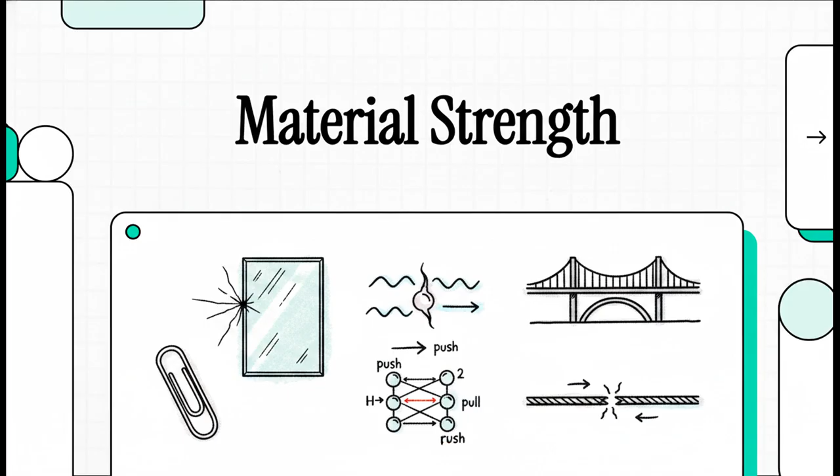Today, we're digging into the science of material strength. We're going to find out why things bend, why they stretch, and, most satisfyingly, why they snap. So let's get right to it. What actually makes something strong? It sounds like such a simple question, but the answer is way more interesting than you'd think.

See, it's not just about how much force something can take. It's all about how a material behaves on the inside when that force is applied. And to really get it, we need to look inside the material itself. Okay, to get our heads around this, we're going to start with the absolute simplest thing you can do to an object. Just pull on it. This is called tension, and it's the perfect way to introduce the two most important concepts in all of material science: stress and strain.

Picture this. We've got a simple steel wire, just hanging from the ceiling. Now, we start adding weights to the bottom, one by one. As we add more weight, which is just another word for force, the wire starts to stretch. It gets longer. Now, that seems totally obvious, right? But what's really happening inside that wire is a constant, invisible battle.

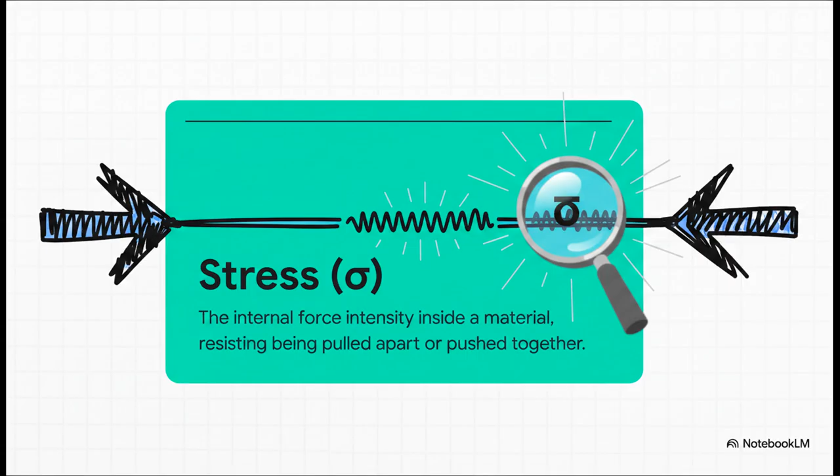So, the first big idea we need to tackle is stress. You'll see it written as the Greek letter sigma (σ). Now, here's the key thing. Stress isn't the weight we're hanging on the wire. Stress is the internal force the wire itself creates to fight back. It's the material basically screaming, hey, you are not pulling me apart that easily. It's that internal resistance spread out over the area of the wire.

And what happens when the material is under all that stress? Well, you get strain, represented by the Greek letter epsilon (ε). Strain is the thing we can actually see and measure. It's simply how much the wire has stretched compared to how long it was to begin with. It's just a ratio, so it doesn't have any units, which is kind of neat. It's just a pure number that tells us how much it has deformed.

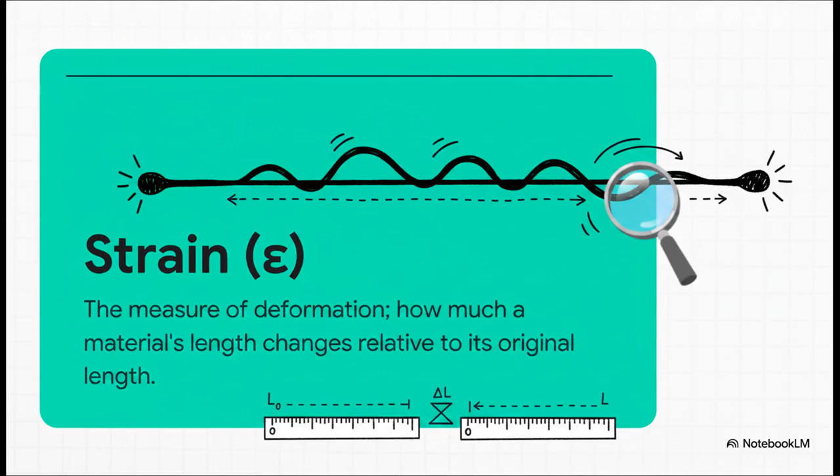So here's the bottom line. The one thing you absolutely have to remember. Stress is the cause, strain is the effect. Stress is the invisible fight going on inside the material. Strain is the visible result of that fight. You get this relationship, and you've unlocked the secret to pretty much everything else in material science.

Now here's where it gets really cool. If we plot that relationship, if we track how much internal stress is building up for every tiny bit of strain, we get something called the stress-strain curve. And honestly, you should think of this curve as a material's biography, or maybe its personality profile. It tells you the entire story of how that material is going to act under pressure, from the first gentle pull all the way to its catastrophic end.

Let's check out the personality of a real workhorse material, mild steel. As we start pulling on it, the stress and strain go up together in a nice straight line. That's the elastic region. If we let go anywhere in this zone, it snaps right back to its original shape, no harm done. But then we hit the yield point, and that's the point of no return. The material has started to permanently deform. It gives up trying to go back.

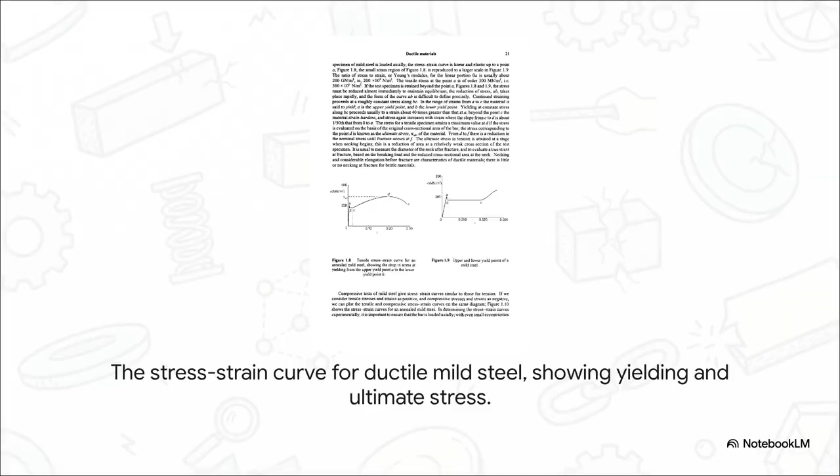As we keep pulling, it actually gets a bit stronger for a while. That's called strain hardening, before it reaches its absolute maximum strength, the ultimate stress. This whole behavior makes mild steel what we call a ductile material. Ductile materials are, well, they're the forgiving ones. They bend, they stretch, they give you a ton of warning before they finally fail.

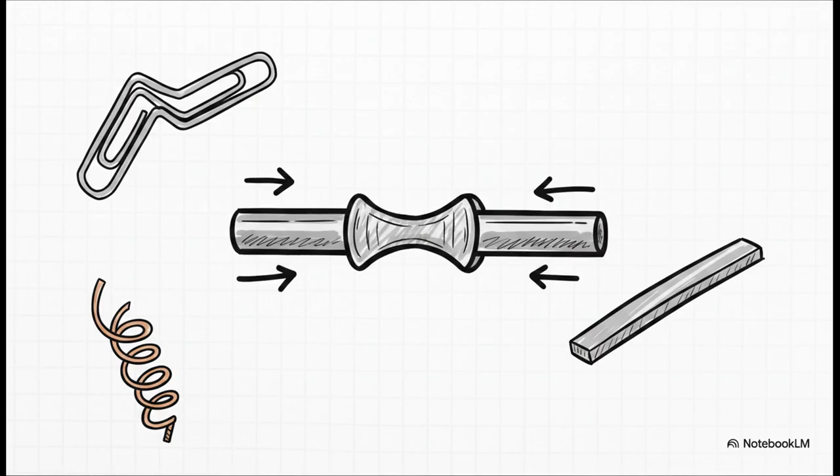You see that thinning area that happens right before it breaks? We call that necking. And it's a huge visual clue that things are about to go very, very wrong. It's exactly what happens when you bend a paperclip back and forth.

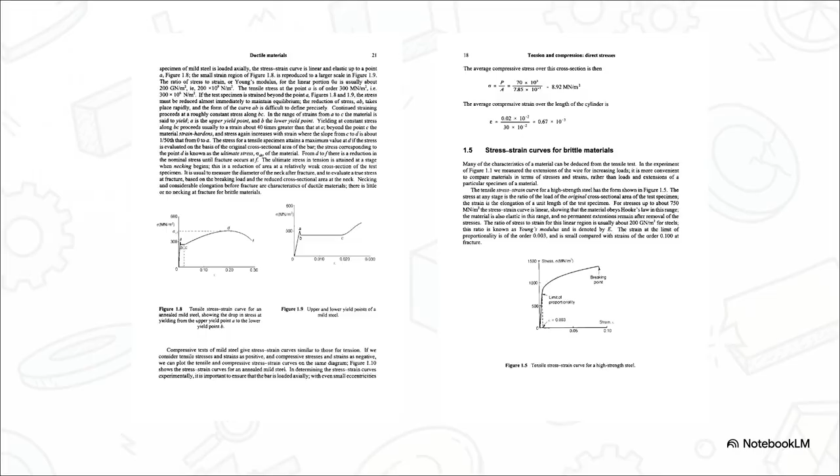It just snaps. And that's the whole deal with brittle materials. They are incredibly strong right up until the moment they're not. They give you almost no warning, no plastic deformation before they just fracture completely. Think about a pane of glass or a ceramic coffee mug. They don't bend, they just break.

This is also why concrete is so weak if you try to pull on it. It's a brittle material and just can't handle stretching. All right, so we've covered pulling things apart and squishing things together, but forces don't always act head-on. What about forces that try to slice through a material or make one layer slide past another? For that, we need to talk about a whole different kind of stress, shear.

This is shear stress. And we use the Greek letter tau for it. The best way to picture it is to think about a deck of playing cards. If you push on the top of the deck, the cards all slide past each other. That sliding force between each card is a perfect analogy for shear stress. It acts parallel to the surface, not straight into it like tension or compression.

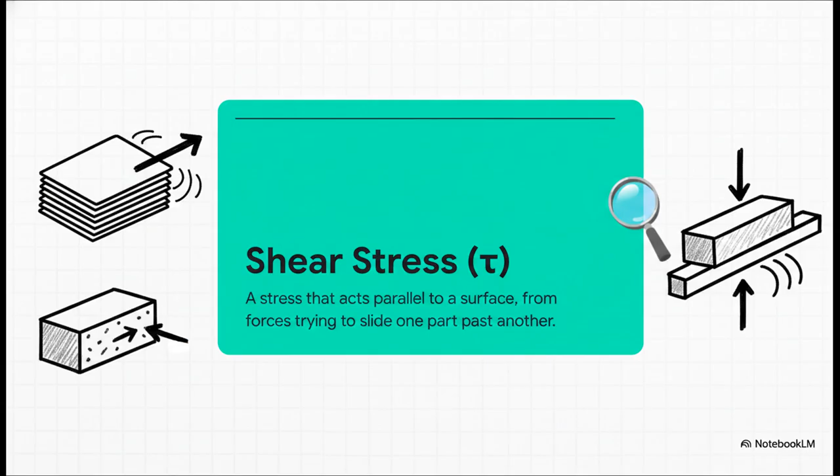And once you know what to look for, you see shear everywhere. The rivets holding the plates of a bridge together, they're under intense shear, fighting to keep those plates from sliding apart. The same goes for the bolts in your car's engine. Heck, even using a hole punch is a classic example of causing shear failure. You are literally shearing a little circle of paper out of the main sheet.

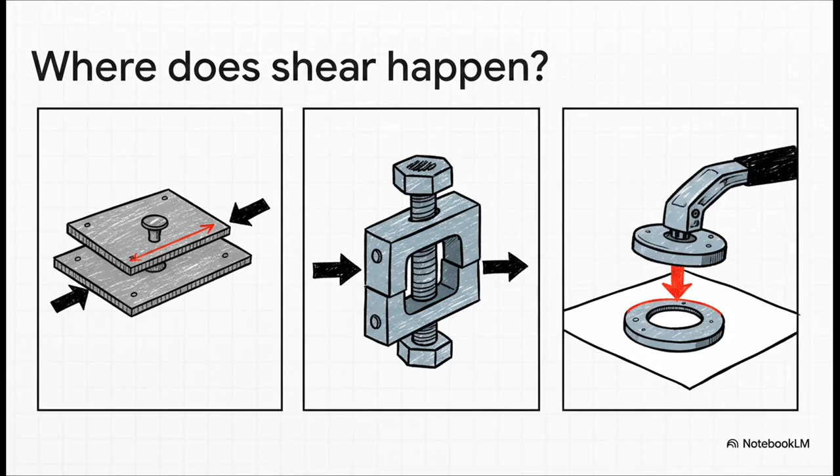And here's a little mind bender for you. Even when you're just pulling on a bar in simple tension, you are creating shear stress deep inside it. But the wild part is, the maximum shear stress isn't straight across the bar. It's actually acting on planes that are at a 45-degree angle to the direction you're pulling. These forces are always connected in surprising ways.

So, in the real world, these forces hardly ever show up to the party alone. They're all mixed together. A simple beam holding up a load is the perfect place to see this complex dance between tension, compression, and shear, all happening at the same time. Let's take a look at this cantilever beam. It's just a beam that's fixed at one end, with a force pushing down on the other. It looks about as simple as it gets, right?

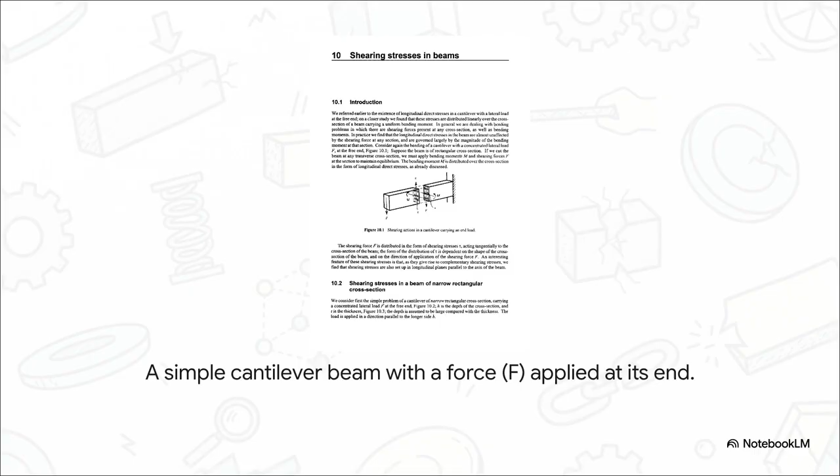But believe me, inside that beam, there is a total war zone of competing forces raging at every single point along its length. So as the beam bends down, it's pretty intuitive that the top fibers are getting squished together, that's compression, and the bottom fibers are getting stretched apart, that's tension. Simple enough, but what's stopping the top half and the bottom half from just sliding past each other? What's holding it all together?

And this is where shear comes back in as the unsung hero of the story. The shear stress isn't the same everywhere in the beam. In fact, it's zero at the very top and very bottom, right where the tension and compression are the strongest. The shear stress is at its absolute maximum right along the neutral axis, dead center in the middle of the beam. That's where it's working the hardest to keep the beam from tearing itself apart.

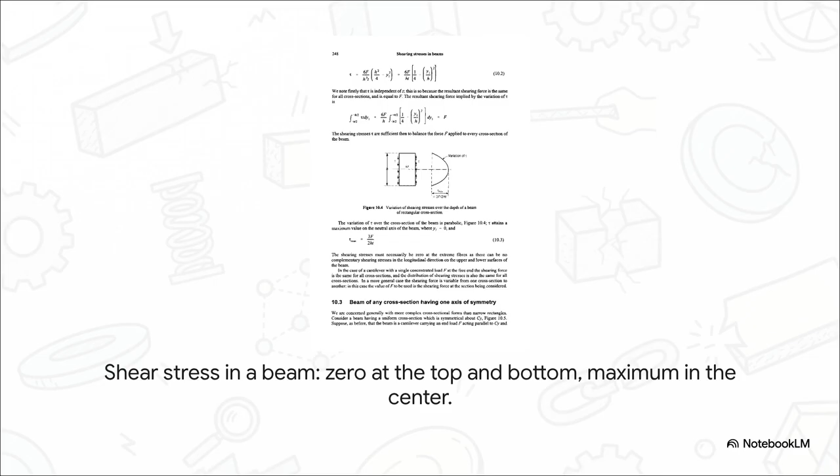So why do we care about all these invisible forces? I mean, why go through all this trouble? Well, because understanding them is literally the only reason our buildings are still standing, our planes stay in the air, and our bridges don't just collapse into the river. It's the absolute bedrock of safe engineering.

At the end of the day, every single structure you rely on is the result of a very careful set of calculations. Engineers have to understand exactly how stress, strain, and shear are going to affect every single part, just to make sure those internal forces never, ever exceed what the material can handle. The whole process really boils down to this three-step dance.

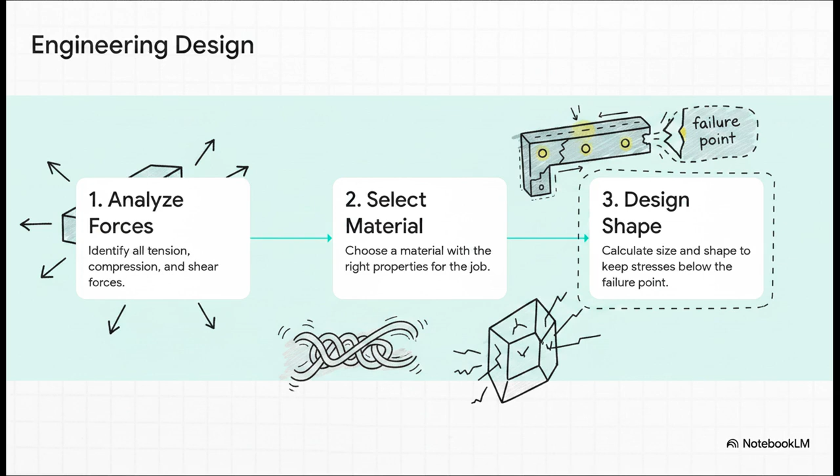First, you analyze all the forces that are going to act on the part. Second, you pick a material that has the right personality. Do you need something ductile that will bend and give a warning, or something brittle and rigid? And finally, you design the exact size and shape to guarantee that the internal stresses always stay in the safe zone, far, far away from that material's breaking point.

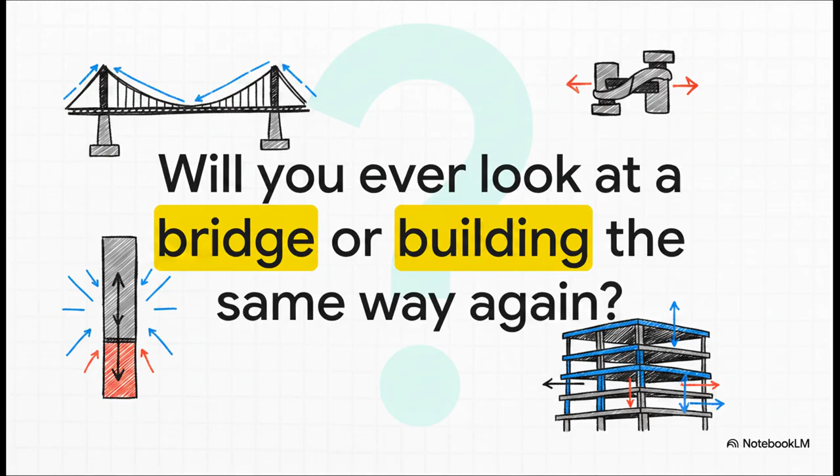So the next time you walk across a bridge, or fly in a plane, or even just put a heavy book on a shelf, take a second to think about that silent, constant battle happening deep inside the material. That invisible war between stress, strain, and shear that quite literally holds our entire world together.